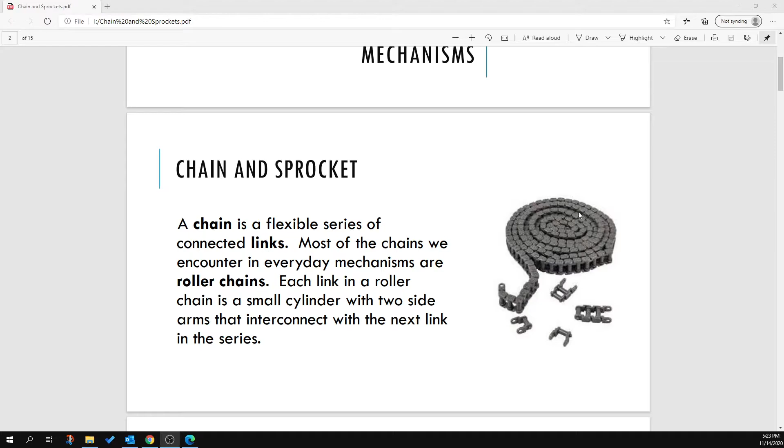The sprocket is a gear that has a specialized shape to all the teeth, and it's shaped to fit into specific slots on a specific chain. It's meant to drive the chain—they're not meant to drive each other. They're meant to drive the chain, which will drive the next one.

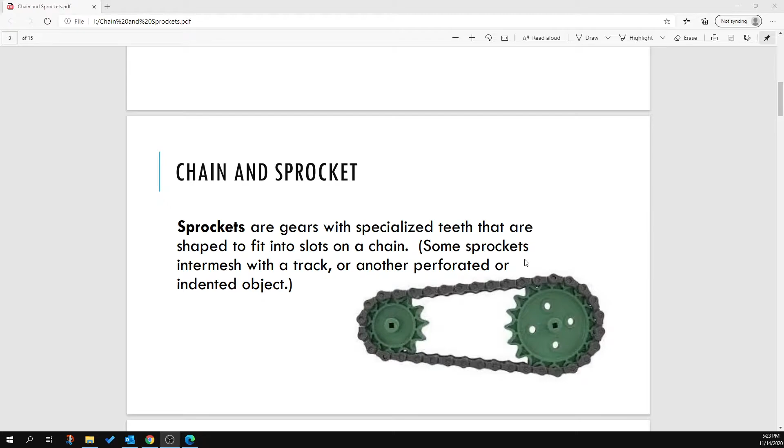Some sprockets will intermesh with like a solid track or something with holes in it, perforations, or just indentations. But the ones we're using, again, we're going to be using these chains, specifically the roller chain. One thing they're really good for is having perfect timing between your drive and driven axles.

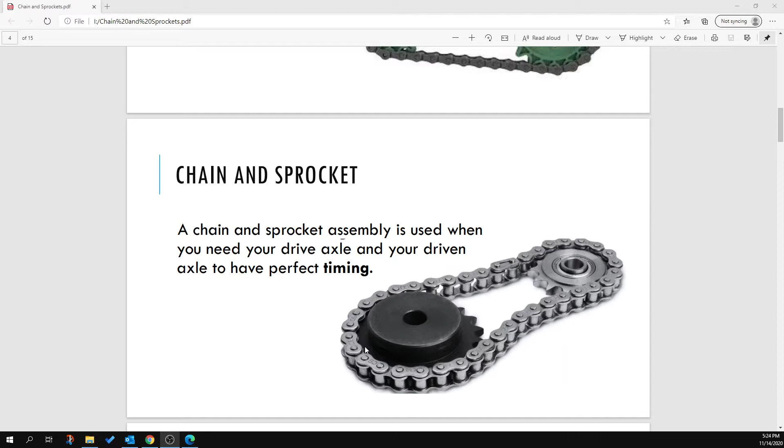One of the biggest things when I was doing some more research than what's just in the PLTW book, they said, hey, why not use a belt and pulley system? Because belts and pulleys is essentially the same kind of thing—you've got round things that spin around, and you've got a belt that goes around them. But what if you get some resistance, or what if the torque increases or decreases? The belt might slip, your friction might not be enough, and the belt might slip, and that would not have good timing, and that creates problems in certain scenarios.

There are pros to using a belt, and depending on your situation, being able to have slippage might be a pro. Let's say you're in a factory, and if someone's hand gets caught in the machinery, if the belt slips instead of pulling your hand into the machinery, that's a good thing. You want the belt to slip in that case.

So the distance between your drive and driven axles is not going to be determined by the size of the sprockets, but by the length of the chain. I don't like how I phrase this anymore.

What I'm trying to say is that you don't necessarily need, if you had two gears and you're trying to get the teeth to line up and mesh, sometimes it takes a bit of finesse to figure out which hole do I put the axle through on my support structure, how do I make sure these teeth are right where they need to be. It's a bit of a pain sometimes, because if you can't line it up right, you have to undo something and move it over. It's annoying.

If I want to change out a smaller gear for a larger gear, now I've got to move my axle over. Or if I want to change my larger gear for a smaller gear, I've got to move my axle over. It's annoying. But with a chain with sprockets, now I can put my gears where I want them to be, and I just have to increase or decrease how many links in the chain. I just have to worry about how many links I've got, how big my chain is. And that's a lot easier to fix than undoing the entire axle system.

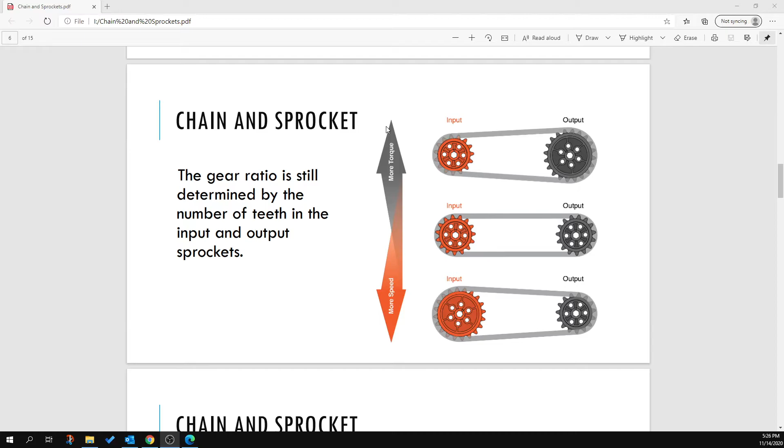Another cool thing, your gear ratio is still determined the same way. I love this sort of image, I wish I'd found it sooner. The larger my input gear gets compared to the output, the more speed I'm going to get. The smaller my input gear gets compared to the output, the more torque you're going to get. And that's just the way things are.

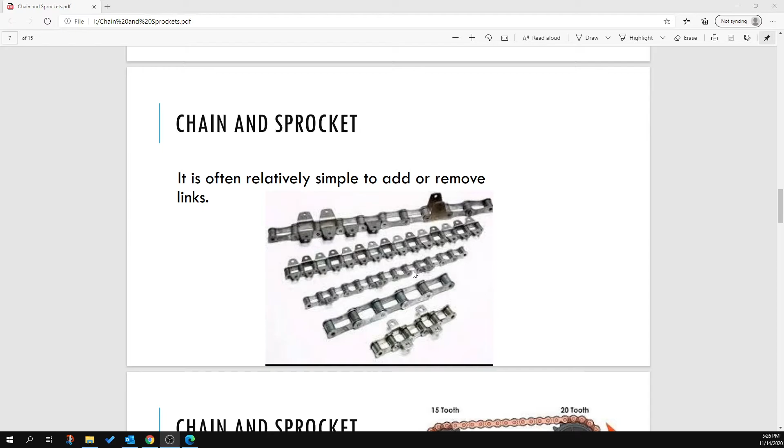It's usually pretty easy to add and remove links to your chain. Here's a bunch of different chains I just found. This one's kind of like the one we've got. The other ones, like these bottom one and top two, and even this one, have a link with a little place you can attach something. So you can attach things like tank treads, buckets for conveying items, or teeth. You can attach stuff to it, so that's really cool too.

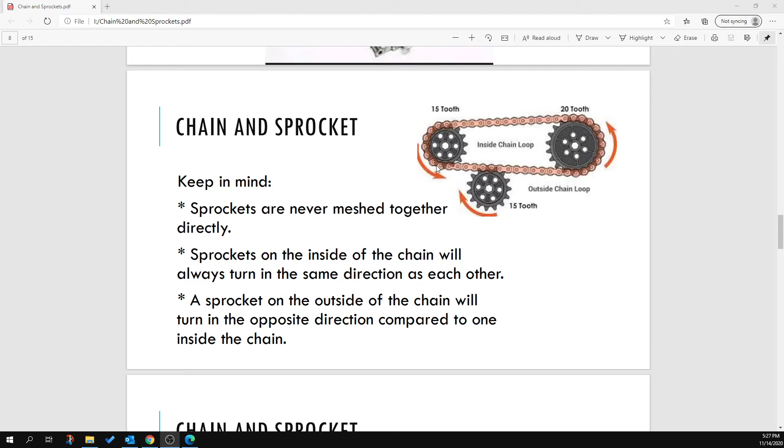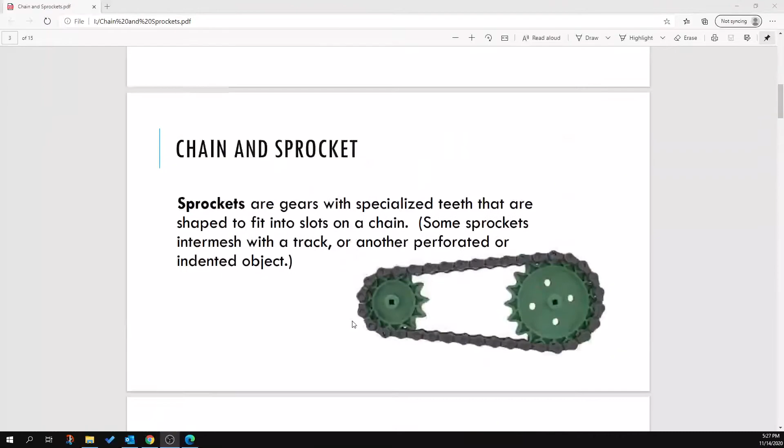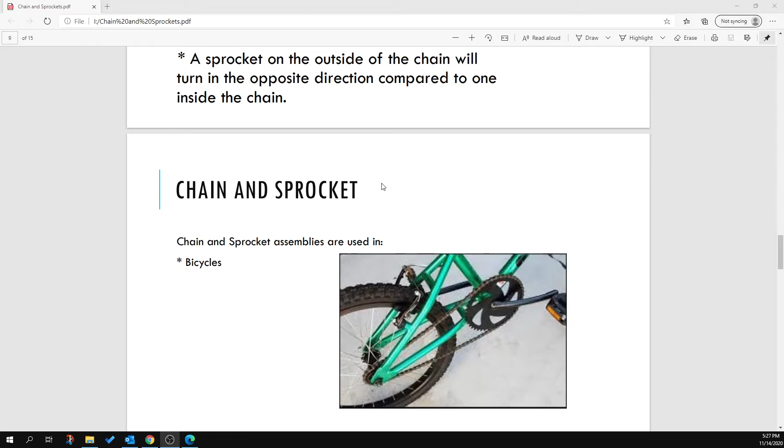Another way you can eliminate the need for an idler. Where do we find them? We find them in bicycles, you see them a lot in bicycles. Sometimes a lot of students saw this image and said, hey, that's the thing that's on my bicycle. I said, yeah, that is a thing that's on your bicycle. It's just like that. Of course, that one up there was made of plastic, the one down here is made of metal. But yeah, there is a bike chain.

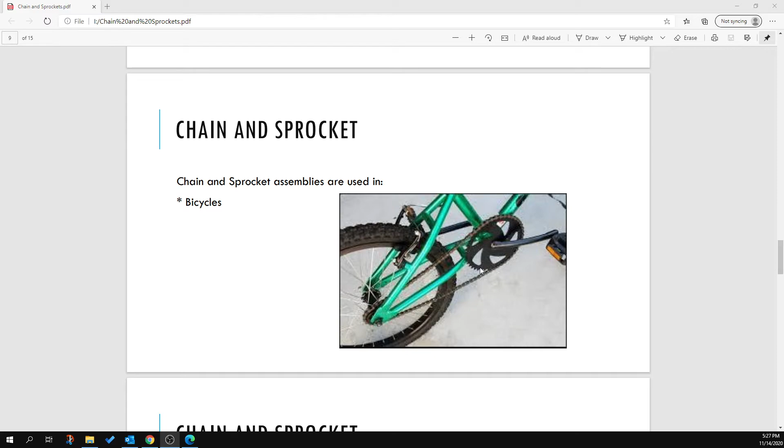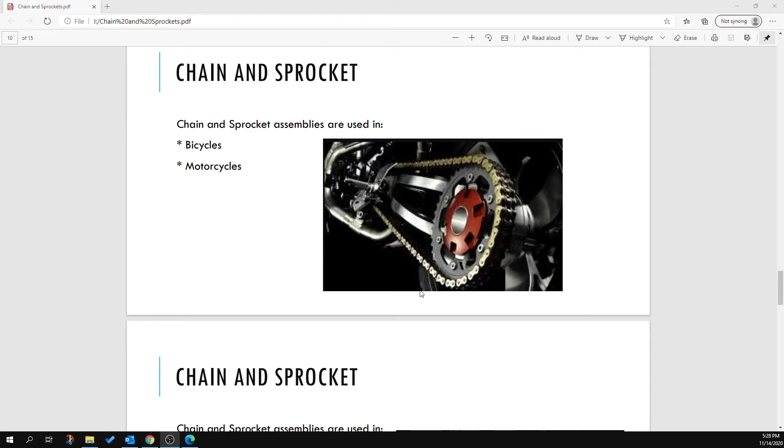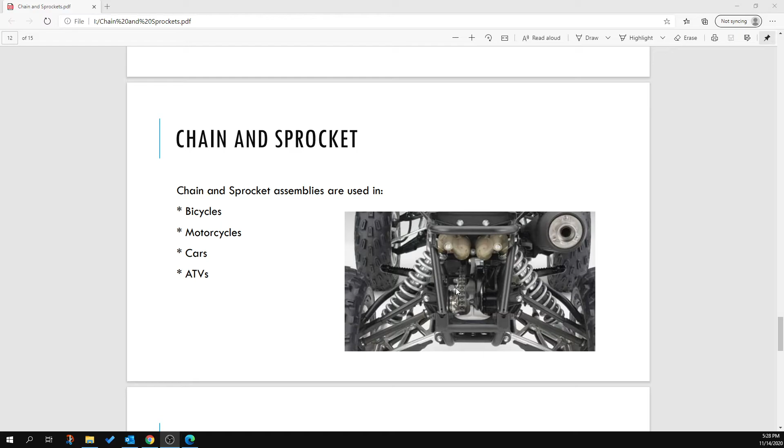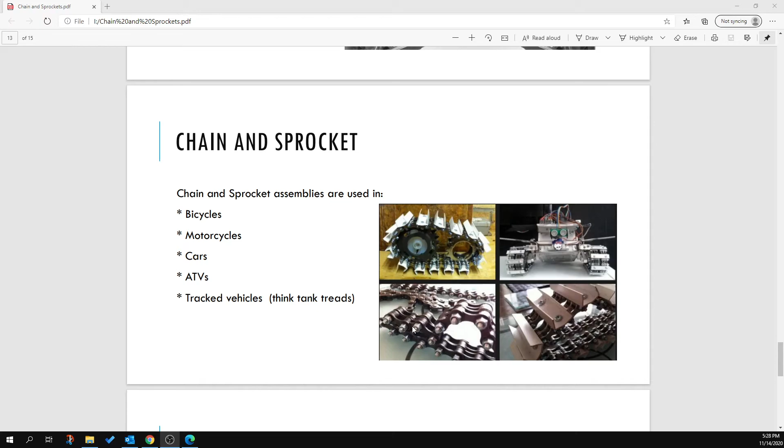If I ask a question like, is my speed going to increase or is my torque going to increase in the system with this gear, or this sprocket, and the chain between them? Think about it. They're also used in motorcycles, same basic idea, you're going to have an engine instead of pedals driving your wheels, but the same basic idea. Cars - there are some locations in a car where they're going to have chains and sprockets. There's chains and sprockets in your ATVs. Here's some tank treads, you can see they have flats on the outside of these chains that are attached, so vehicles with tracks.

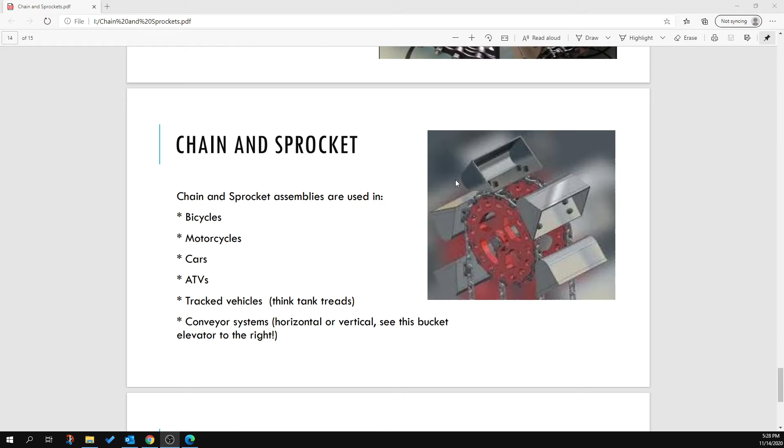Here's a picture I found, it looks like a SolidWorks or some computer drafting image of a bucket system to convey things up, dump them out, go back down again. So you can have conveyor systems. I thought of this after one of my classes, I was like, oh, I'll put chainsaws on there too. Yeah, chainsaws - there are teeth attached periodically along links, and once this chain gets up to speed, those teeth cut right through stuff.

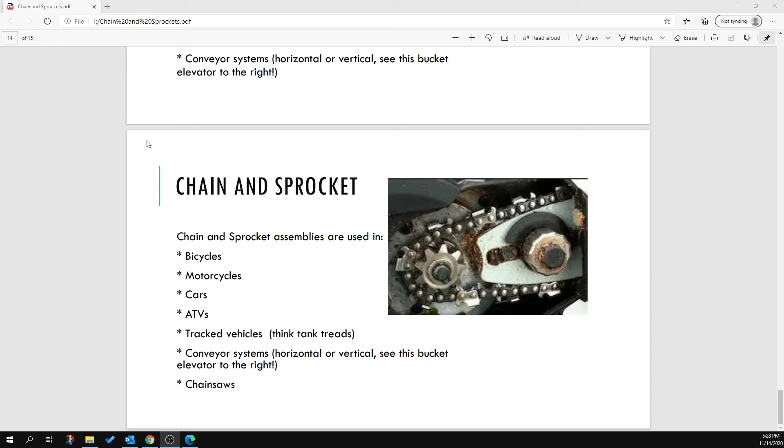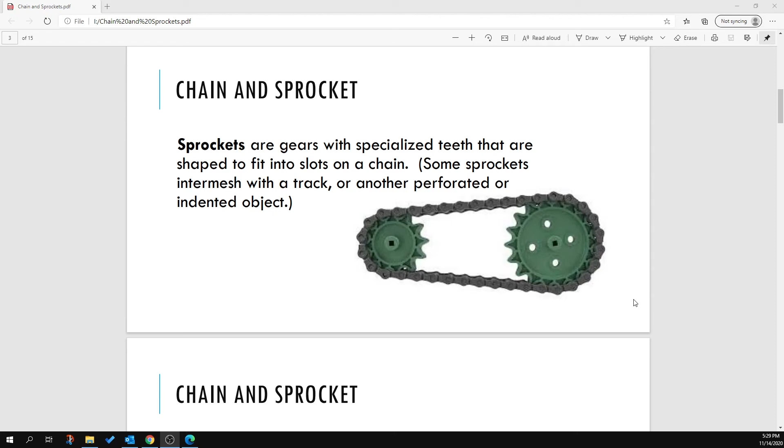That's basically all there is to it for chains and sprockets. Some of the questions we see over and over again in the little quizzes are: is the flow of power reversible? If I spin this sprocket, will it spin that one? Yeah, it's reversible. Can I change directions? Yeah, I absolutely can. I don't know what other questions there were, I can't remember right now. Probably like gear ratios - if I have my input gear being small, my output gear being large, then my ratio will be a larger number to a smaller number.

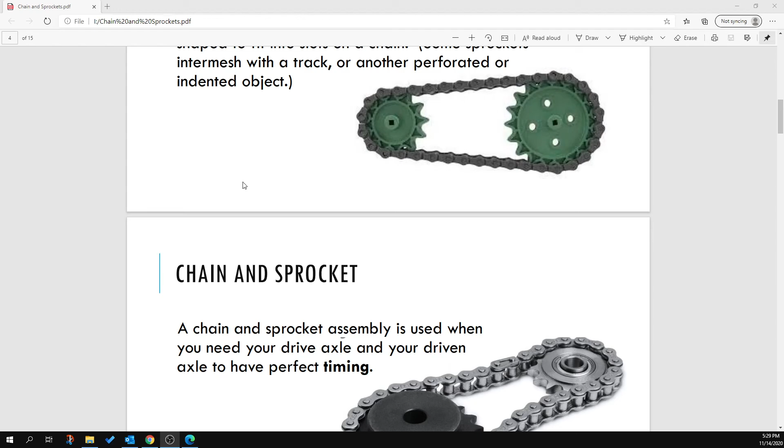Anyways, it was really fun building these. I'm excited, it's one of the, because chains are so much fun in general, because you can add all the links together, all of them, and you can make them spiral around. You can make giant loops of chain. Like my 9th graders that came in at the end of the day were playing with them yesterday. They were like, oh, look at all these links. It's so much fun, and I was like, all right, just don't break them because they're made of plastic. And that's the part that I found broken most often, were little chain link pieces.